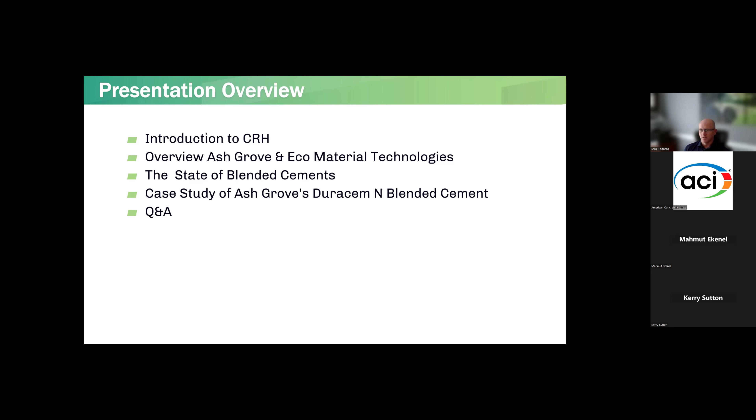So just to introduce you all to CRH, we are the leading building materials business in the world. We manufacture and supply a wide range of building products, materials, and innovative end-to-end solutions to the construction industry. Our products can be found throughout the built environment, whether it's in infrastructure or homes or commercial buildings. We have a long-standing and proven commitment to sustainability, and we're always considered amongst the leaders when it comes to those ideals. Our materials, value-added products, and building solutions play an important role in shaping a more sustainable built environment. As you'll see as I go through the presentation today, it's in our DNA.

CRH has also been included in the Fortune Global 500 list for over 20 years now. So a large organization, a lot of different business units, as you will see. But today we're going to focus mainly on the cement side of things. So taking a look at CRH's portfolio of products and services: anything from aggregates, lime, cement, ready-mix concrete, pipes, precast concrete products, asphalt, construction services, outdoor living, so think of pavers, retaining wall blocks, things like that, composite structures, and also a whole host of construction accessories make up our portfolio.

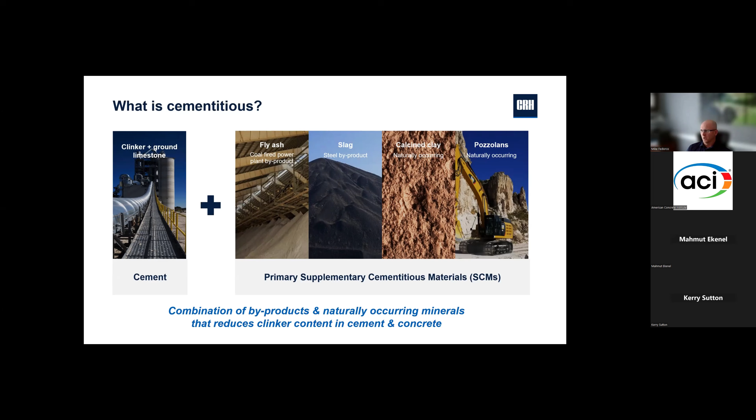In 2018, they acquired Ash Grove, who I work for today, and their assets that gave them a large footprint throughout the United States. And then along the way, they've continued to acquire and build on that in 2024 with some assets that came over from Martin Marietta to continue to expand our traditional cement production business.

Along the way, we also created what we call our Sapphire Group. They are focused on alternative fuels and sources of innovative SCMs. And then most recently, which some of you may have seen in the news, last year we acquired Eco Material Technologies, who is the leading provider of coal ash based SCMs in North America.

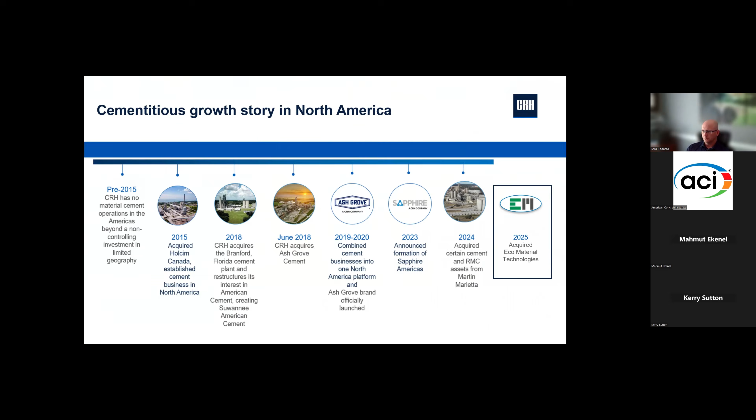So when we talk about cementitious, just to wrap things up here under CRH, it's the three companies working together in conjunction that I have up here on the screen. It's Ash Grove, who is one of the leaders in North America of manufacturing traditional cements and blended cements. Eco Material Technologies, our newest family member, they are a leader in bringing SCMs to the market. And then Sapphire, who is transforming residual and non-recyclable materials into alternative fuels and raw materials that we can use for our products.

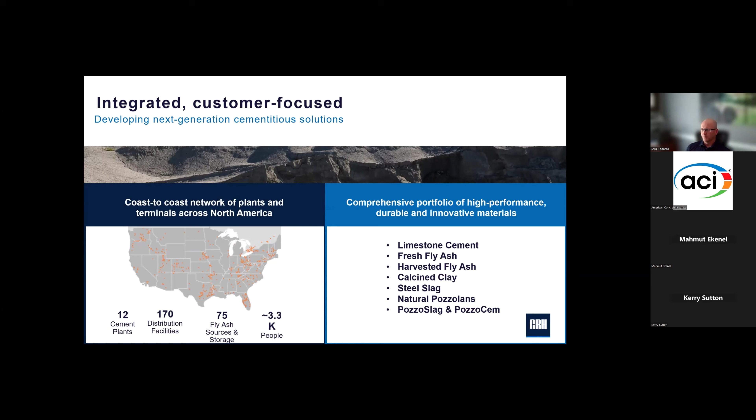We have a comprehensive portfolio of high-end, performance and durable innovative materials, including limestone cement, which is a majority of what we've been producing here, fresh fly ash, harvested fly ash, calcined clay products, steel slag, natural pozzolans, and green cement offerings that are innovative binder solutions being offered by Eco Materials, known as PozzoSlag and PozzoCem.

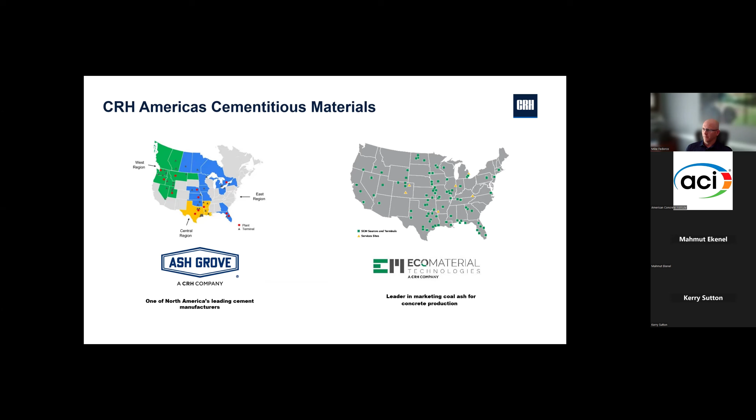So just to give you a little more background on Ash Grove, who we are. While Ash Grove was acquired in 2018 by CRH, it's not a new business. It's been around since 1882, when it was founded. It has over 2,000 employees across 60 locations here in North America, and we service customers in the US and Canada. We deliver high performance cementitious materials, technical expertise, and customer support.

We're focused on innovation, consistent quality and sustainability. Our products go into building everyday infrastructure, whether it's highways and bridges, schools, public facilities, commercial and residential projects. We're committed to safety, operational excellence, and our customers' success.

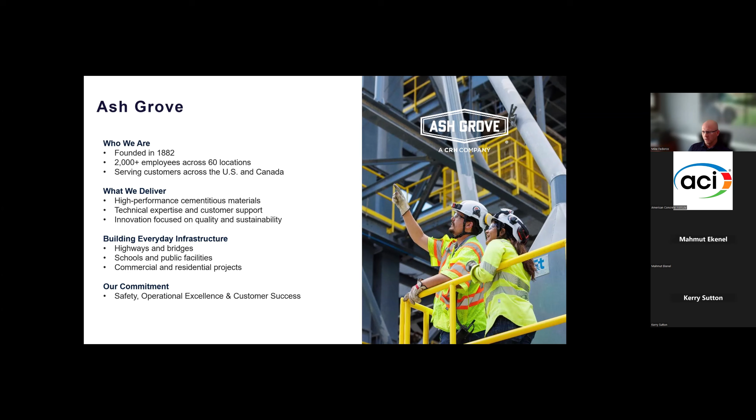Eco Material Technologies, they're North America's largest marketer of coal combustion products. As you saw, they have a nationwide network of terminals and distribution facilities, servicing customers across multiple industries. They deliver sustainable cementitious materials, primarily SCMs, that can be used in blended cements, resource recovery and beneficiation solutions at sites, technical expertise in those areas, and logistics support.

They have an extensive logistics network to help service their customers anywhere in North America. Supporting infrastructure, they support the production of concrete and other construction materials, manufacturing applications, land management, and redevelopment projects. Their commitment is to innovation, sustainability, and operational excellence.

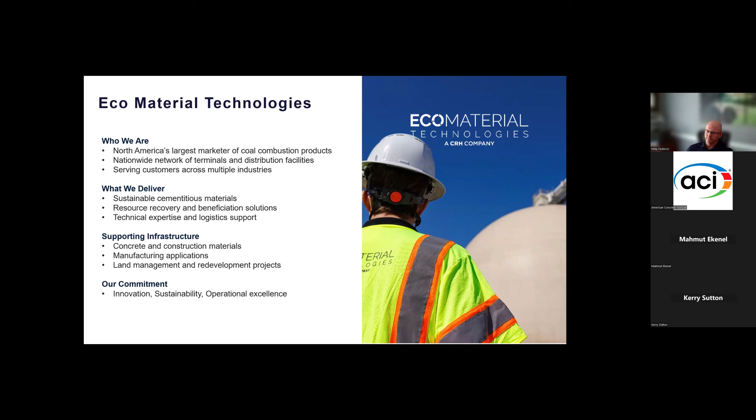So just to dive deeper into who EcoMaterial is, on the surface you see the products that they sell into the market and produce, whether the fly ash, the beneficiated ash, harvested products, Syngyp, things like that. But on the backside, when we talk about sustainability and promoting green products, they're providing a service to the coal industry, the coal-fired power industry.

Historically, fly ash has been used in cements and concrete. But in this case, a lot of it could not be used or wasn't deemed suitable at the time for use, so it was landfilled. There are large landfills throughout the United States near coal plants holding this unused coal ash. EcoMaterials provides a service where they will harvest that and beneficiate it, getting it ready for use as a suitable SCM in product.

So not only are they on the front end providing a product that's lowering clinker in cement, but also they're taking waste product that was just sitting in a landfill at the coal-fired power plants and putting it to good use.

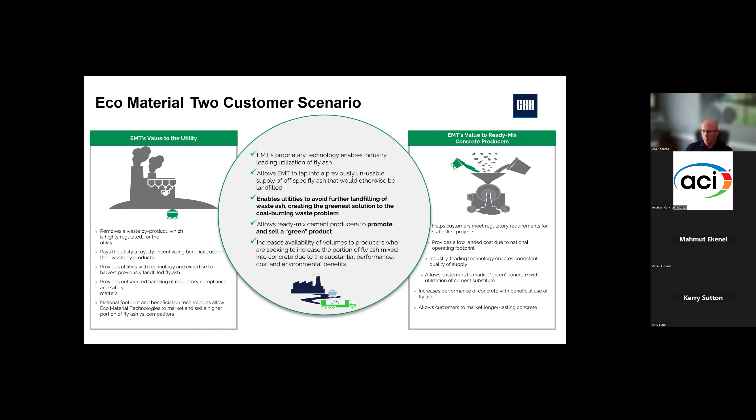So just a little bit more about EcoMaterial, since they're our newest family member, about what they do and their products and services for those of you who aren't familiar with them. Fresh fly ash is a big part of their business - harvesting, partnering with coal-fired power plants throughout the U.S., harvesting that fresh fly ash, and handling the logistics involved with getting it to the customers.

As I just mentioned, the landfilled ash near these plants that's been sitting there for many, many years in some cases - they are heavily invested into harvesting and beneficiation of that product to make it into a usable product that we here in the cement industry can utilize.

They're also involved in natural pozzolan processing. They have a few sites throughout the U.S. where natural pozzolans are being sourced, processed, and made usable as an SCM for cements and concretes.

They have manufactured products as well. So when you look at the Pozzo slag and the Pozzo SCM I mentioned earlier, they're alternative binder materials - taking what was deemed somewhat unusable waste products and transforming them into something interesting, neat, and innovative. In these cases, some of these are zero clinker factor type materials.

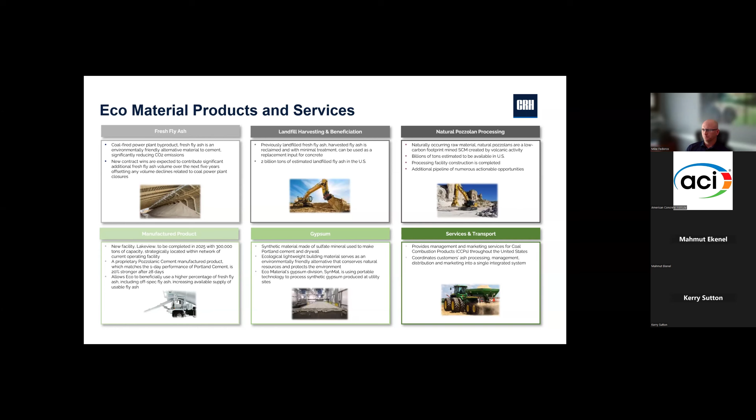We've committed to some ambitious goals - a 30% absolute reduction in group-wide emissions by 2030, targeting scope 1, scope 2, and scope 3. That aligns with our ambitious target of being carbon neutral by 2050.

In addition to what I mentioned with Ash Grove and what we're doing with blended cements and EcoMaterial, CRH also has a dedicated innovation fund that invests in internal projects and external partnerships to help support new technologies and innovative ideas. There's also a wing of CRH known as CRH Ventures, a corporate venture capital arm that partners and invests in startups, once again supporting innovative new ideas to bring low carbon solutions to the market.

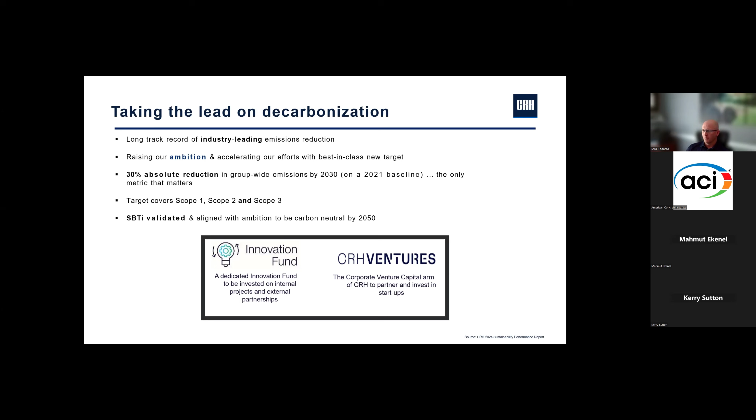So our next segment here is going to be on blended cements and new SCMs, and kind of the state of where things are at and where we're headed.

So the American Cement Association put out the roadmap to carbon neutrality. There's a lot of pieces to it - whether it's on the clinker side, reducing CO2 emissions there, or the cement side - what can we do? We're talking specifically here about blended cements and lowering our CO2 footprint with that. In concrete, something can be low carbon, but if it doesn't last very long, then over its life cycle it's significantly high carbon. So we want to make products that last and are more durable than what's been put out there in the past. And then there's carbonation as a sink, a CO2 sink as well - so there's different pieces to the chain.

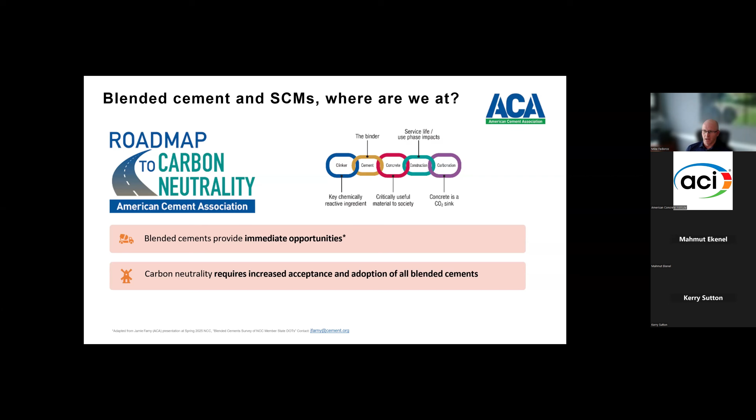Today we're talking about the blended cement piece to it. Blended cements have been utilized successfully in many parts of the world and here in the US for many years. There's immediate opportunities to continue to leverage that and expand upon that to help meet these goals in the roadmap. But in order to do that, we have to increase acceptance and adoption of blended cements. That's not something that just happens with the flick of a switch. There's a lot we all need to work together as an industry to put out good products that are not only sustainable, but they're also durable, and meet the needs of our end users and are going to last the test of time.

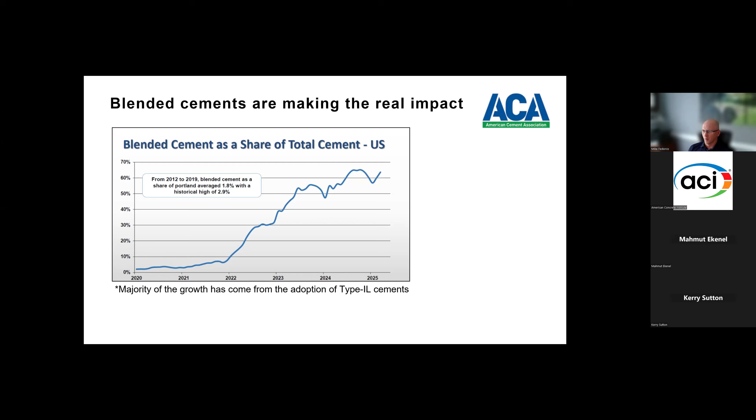Taking a look at where we're at today here in the US, blended cement growth has taken off since 2022. That's really been driven by the adoption of Type 1L cements, who are considered a blended cement. So there has been some changes. The positive is it's the most widely used type of cement in the United States today. There's many, many successful projects out there that utilize and have been utilizing those cements. I would say if there's any negative as an industry, we probably could have done a better job rolling out, introducing the product to the market. But largely, folks have gotten over the initial growing pains with it and are using it successfully, whether it's infrastructure or residential construction or commercial, whatever it may be. The Type 1L cements have been adopted and are being used.

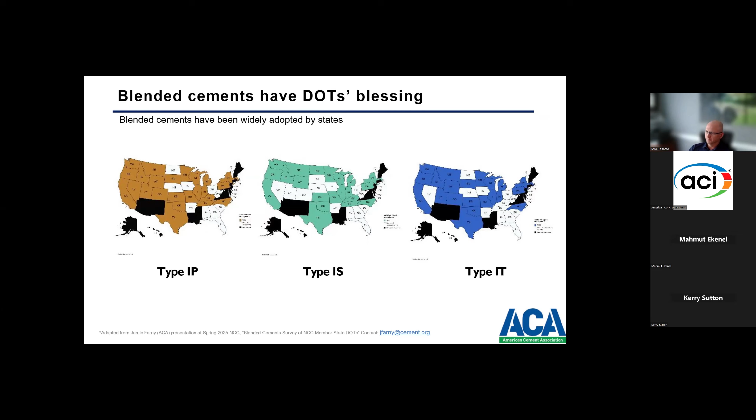Switching topics now, let's talk about what goes into a blended cement. You have your traditional Portland-based, clinker-based cement blended with some type of SCM. Traditionally that's been whether a fly ash that comes from a coal-fired power plant, or a slag that comes from a steel blast furnace, or a natural pozzolan from a volcanic eruption. There's also starting to be some really interesting and new innovative SCMs being introduced out there by startups that are going through some kind of transformation in a reactor, taking what was once probably deemed an unreactive waste product that wasn't really considered for use as an SCM, that could ultimately be used in a blended cement.

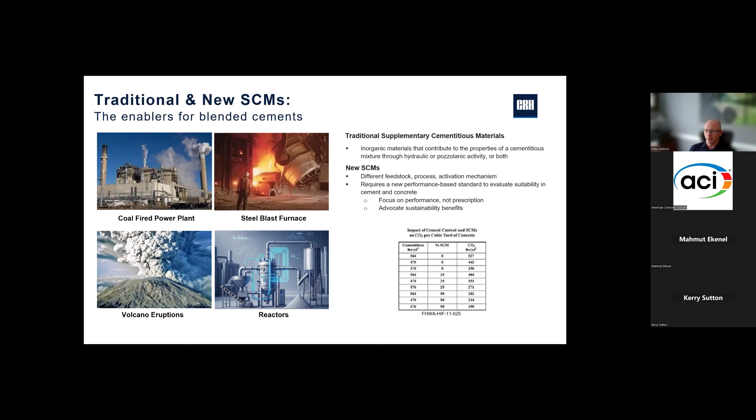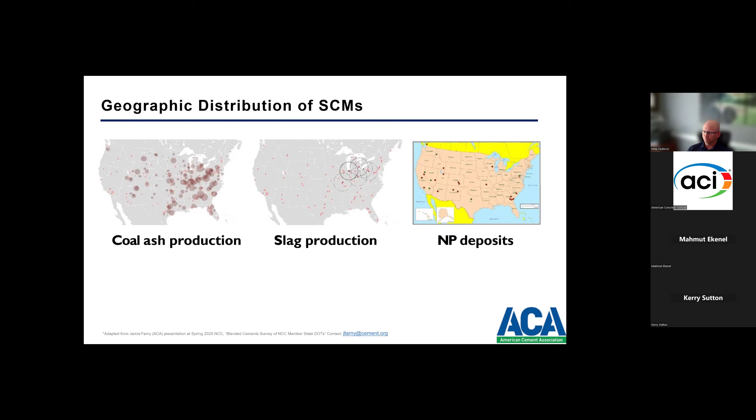Then there's also, as I mentioned, the new binder developments. I apologize if any of you on the call, I don't have your company up here. There are so many of them right now getting into the market, bringing innovative new solutions out there for binders or SCMs. They're taking something that maybe was an unused or unusable waste product in the past, figuring out how to transform that and make it into a reactive SCM that we could utilize, or something that lowers the carbon content of the overall cement mix to benefit our sustainability goals. But there's so many of them out there, and it's great to see that there's a lot of not only innovation going on, but the market's recognizing that, and they're investing heavily in these businesses.

So what's our pathway to blended cement success? We had to continue to prioritize sustainability, but also the products need to be resilient. We can make the most low carbon cement out there, but if it only lasts 10 years and has to be replaced, that adds up pretty quickly. So we need products that are resilient. Not only is it not sustainable if they don't last, it's expensive, with the short life cycle. So we want products that are going to stand the test of time, but also be able to deliver low carbon solutions.

We want to adopt performance-based specifications, putting the focus on performance. When we bring these products to market, how do they perform? What box do we have to try to fit them in? Part of that comes with optimized concrete mix designs. As we come to market with these different blended cements, they may be a little different than traditional cements or cements being utilized today. There may be some different things that need to happen as far as mix designs. That's something we need to be aware of and make sure we're coming up with those solutions on the front end.

Before I can get into that, I have to give you the catalyst behind how the story started. Many of you are familiar with alkali silica reaction, ASR, but just a quick level set for everyone. ASR is an issue with concrete that can appear when the right conditions pop up. If you have high alkali cements, reactive silica, and moisture, and they all are at the right time in the right place, you can have an ASR issue.

How it happens is a gel forms in the cement around the aggregates as a result of these reactive aggregates and the cements having a chemical reaction. That gel, when it comes in contact with moisture, which most concrete does, will begin to expand. When it expands, it puts intense internal pressure on the concrete, which leads to cracking. Not just an occasional crack here or there—it's really like an alligator crack, major cracking, deterioration of the slab or the structure.

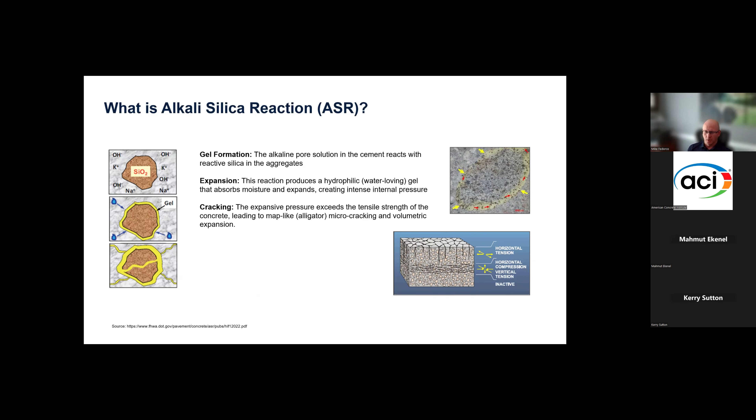So how does that tie into our Duracem N product and how we got here, or what we're doing? The pictures on the right are just some examples of what I mentioned with ASR and the damage it can do. As you can see, the deterioration of the paving surfaces is extensive when it does occur, and they are very expensive remediation projects.

So how did we get here? Our Louisville, Nebraska plant, which is about 30 minutes south of the Omaha area, has been producing a product known as Duracem F since the 1990s to help combat this issue.

How it came to be is in the 1990s, the Nebraska Department of Transportation, NDOT, experienced significant issues related to ASR. They had the perfect storm of cements that were high in alkali, local aggregates and sand and gravels that were reactive, and it's not an arid environment—Nebraska is going to experience moisture throughout the year. Those three things coming together caused significant ASR-related cracking and damage to their paved surfaces.

They did not have a locally feasible non-reactive aggregate to help combat that. So Ash Grove, operating the cement plant there in that region, worked with the Nebraska Department of Transportation to come up with a solution. We experimented with various SCMs to help mitigate ASR through extensive research and pilot projects, working hand in hand with NDOT.

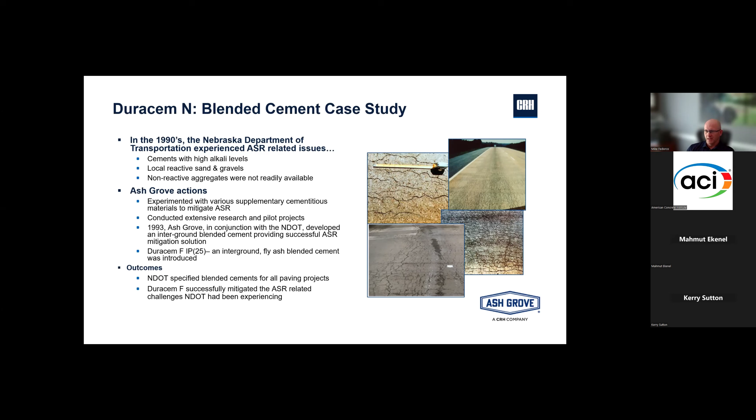As a result of all of that, NDOT saw the results—they were fabulous for them. It really reduced their issues, and they began to specify blended cements for all paving projects. As a result, Duracem F was a successful commercial launch starting in the 1990s up until today.

And why do I say up until today? Well, there's nothing wrong with Duracem F—it continues to be used successfully—but being innovators here at Ash Grove, we're always looking for what's the next thing. We identified many years ago calcined clay as an opportunity not only to tackle the ASR issues successfully that they were having in that region, but also from a sustainability standpoint. The increasing demands coming from the market that we started to see in the latter part of the 2000s into the 2010s showed there were opportunities to leverage a calcined clay blended product at our Louisville plant. So not only does it mitigate ASR, it lowers the clinker content of the cement. We saw an opportunity there.

This met the needs of our increasing requirements from our end users, our customers looking for a more sustainable, lower clinker cement. There was a national trend. There's fewer coal plants today in the US than there has been historically. They continue to close down, and then there's not as much ash available.

We also learned, through clay and the calcination process, we could produce a consistent quality product, right? We're manufacturing it. We knew exactly what the performance was; we could hold it within a tight window of what it was going to do. So we'd have a very tight window of performance and quality that we could bring to our customers. And the best part of it was it's a locally sourced clay.

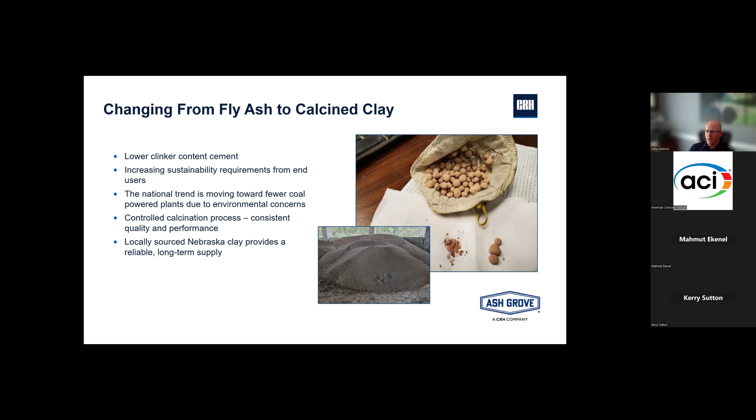We were able to find a suitable clay deposit very close to our Louisville, Nebraska plant. So it was a locally sourced clay. It did not have to be transported across the US somewhere. There's a lot of it. It's a very long-term supply. So it's going to be a stable product for many, many years in that market.

So just to give you a little history of how we got there with our calcined clay, our Duracem N products, a little timeline here. So it began back in 2019. We were exploring, like I said, being innovators, exploring different options. Potentially calcined clay became interesting.

In 2020, we began to do some trials on the mill at our Louisville plant, looking at the strength development and ASR mitigation. And we started playing around with a 30% calcined clay blend. We were seeing successful results with it, and we submitted it to NDOT and gained their approval for it.

We continued more trials through 2021. There were still some things we were trying to work out with it, but we were able to up the content of clay now to 35%. So just to compare where we finished and where we've been historically, our Duracem F product, our fly ash based product, was a 25% replacement. Now we're up to a 35% replacement with the formulation with calcined clay.

Then came 2022. As probably all of you that work in this industry know, those were crazy times, right? You couldn't get enough of anything. It doesn't matter if you were in cement, plastics, steel, whatever it may have been related to the construction industry. Things were booming. You just couldn't get enough of anything.

And as a result, with our cements and our Duracem products, we just couldn't keep up with customer demand. So we had this product known as Duracem N that we had been working with. It looked promising. We talked to some of our customers and they said, yes, we'll take it. It's better than not having anything today. They started using it on projects.

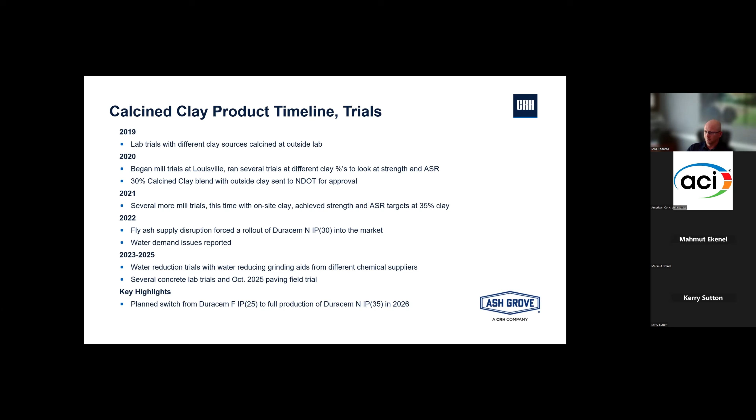So next, I just want to talk to you a little bit more, now that you have the history of why and how we went from a fly ash product to a calcined clay product, about the process that we went through to bring that product to market. We'll start with the clay source identification, talk about some of the trials, validating what we were doing in our labs with third parties to make sure the product was as good as we thought it was, what went into the process and getting the plant up to speed, and then trials there, and then ultimately customer testing and DOT approval.

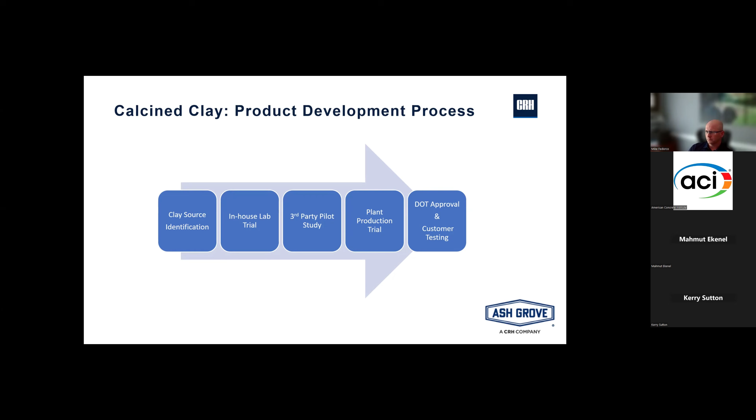So number one is, we had to find a suitable clay source. There are clay sources readily available throughout the U.S. Not all of them are the same. Clay varies depending on the properties you're looking for. But ultimately, looking at different sources and finding ones that were going to work for our project was an extensive research project. Ultimately, we identified one very close to our plant, which was great from a logistics, locally sourced standpoint. And that is the one that we are moving forward with for this product.

But there's a lot that goes into it, whether it's core drilling or testing samples in the lab. How feasible is it to get that material out of the ground? Is there a lot of overburden there? Is it relatively easy to get to? What kind of infrastructure is in the area? Sometimes these things can be in remote areas. Can you get it out of there economically and safely to your plant? So like I said, we identified a source that checked all those boxes to move forward with our Duracem N clay source.

So once you have the clay sourced, what is the process? You need to be able to handle that material when it comes in from the source out in the mine. You need material handling, you need equipment to calcine it, you need storage. All those things we had to consider at our plant and make modifications to be able to produce a consistent product. That took some time, obviously, and investment at our Louisville, Nebraska plant. But I can report that we are successfully online and beginning to produce the product at scale.

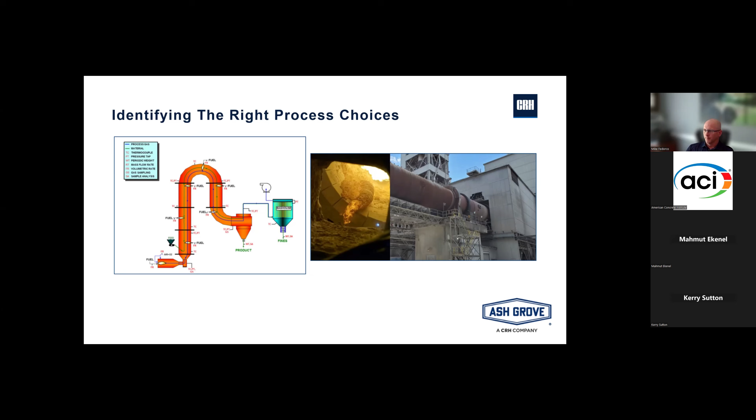Taking a look at the testing, as I mentioned, we had a successful product with Duracem F in the market. It was doing a great job with the ASR mitigation, which we test against ASTM C1567. But it also had to perform strength-wise as well. We could probably hit on some things that mitigate ASR very well, but if you don't have the strength, it doesn't do anybody any good. So this was a balancing act between the two.

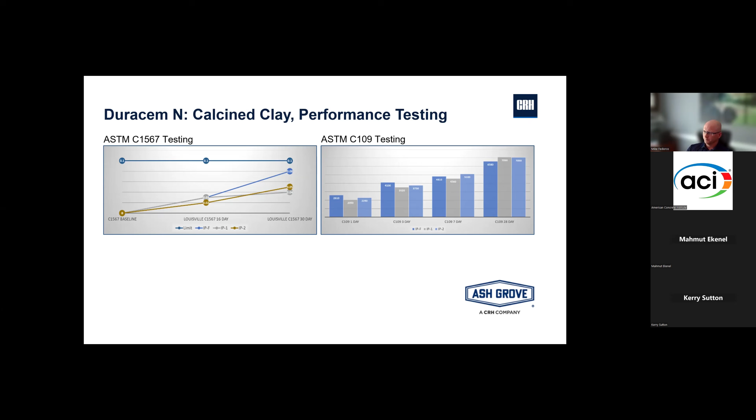So not only on the mortar side of things, testing and making a product as a blended cement producer, we wanted to take it a step further and make sure that it performed in concrete and met our customers' expectations on that side of things. We did a large collaboration with different parties. Some of them were integrated ready mix products companies within CRH, Lyman Richey, and Preferred Materials. We also utilized our Ash Grove corporate lab in Kansas City to vet some of this out.

But we did a lot of trials to understand the plastic properties and strength and things like that, how the material handled, how it placed, through different test methods. Specifically talking about test methods when it came to concrete, we utilized the float test.

It was developed by Dr. Tyler Ley to assess the finishing characteristics, right? How's the surface close? What does the surface look like as it's closing? How easily does a trowel of different types pass over it? So we put it through all that.

We also, through the process, as we worked hand in hand with these customers and our partners, saw that, hey, that brown cement's pretty interesting looking. I think we heard many comments that it looked like a chocolate bar. The test results look great. It's performing awesome. But can you make it a little more gray? So we heard that loud and clear.

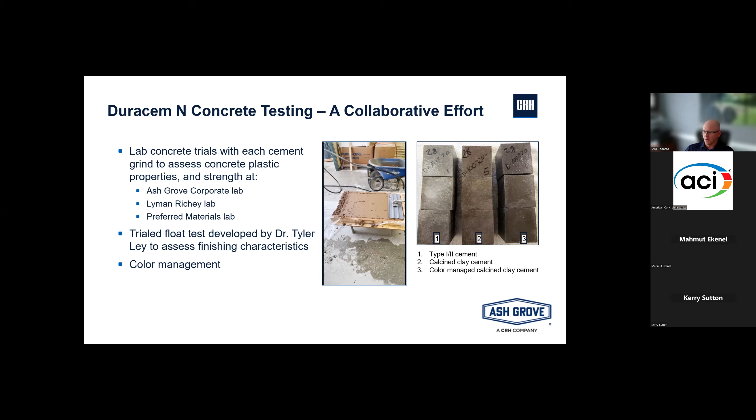So then came the most exciting part of this project so far. Okay, we've done all this lab testing, we've done all this scale up at the plants, we've worked with our partners on evaluating the mortar and the concrete. But until you get it out into an actual project and put it through the equipment that's actually going to be utilizing it out in the field, you never know, right?

So last fall, we conducted a large trial, a 2.5-mile slip form paving road pour in Nebraska using this product that was manufactured at our plants, Duracem N 35. Partnering with Lyman Richey for the ready mix production, prior to starting paving we were out there doing test mixes, putting the material through the plant and the trucks, dispensing it, making sure everything was good. We were working flawlessly by the time the paver showed up on the project.

The pavers ended up paving the road with really no issues. It went as planned. Weather cooperated with us. It was late in the fall, but we got a nice stretch of weather, so that was great. But the feedback from the ready mix level and the paving contractor was, hey, if it wasn't brown, because we weren't color managing this batch, we would have thought it was your Duracem F product. So that was the best feedback that we could possibly get.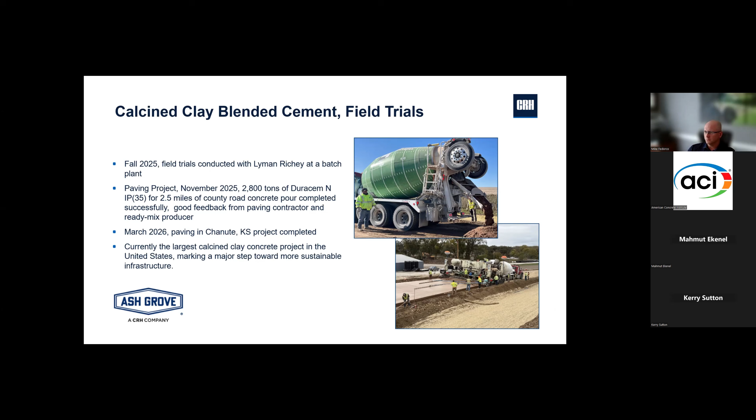So not only, like I said, did we work with our partners on the concrete side, with Ready Mix and our concrete contractors, to successfully do those installations and pour those roads. There's also the third party testing, right? We want to validate what we're seeing through a third

party, and we have partnered with MnROAD, the Minnesota research division. We've laid down some of it there. We've also worked with the University of California Pavement Research Center as far as utilizing calcined clay cements to do their testing. All of this is a partnership. Like I said, it's a collaboration between all of us in the industry to work together on this.

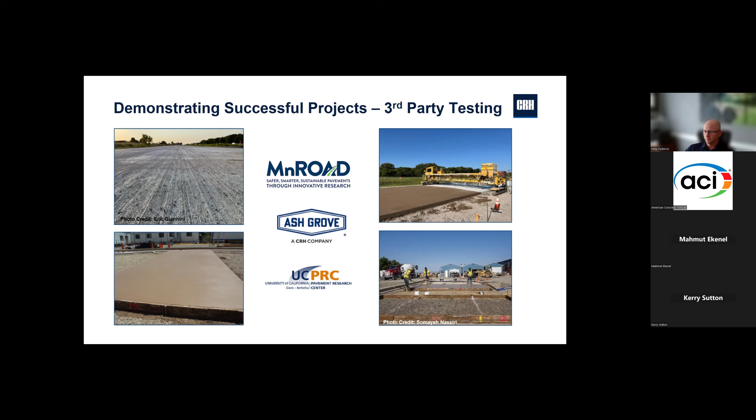So what's the future of blended cements? Continued collaboration throughout, right? We all need to work together to develop the next generation of blended cements. Gaining adoption is key, right? We can have the best products in the world, but if nobody wants to use them or knows how to use them, it's not going to do any of us any good. We are all in this together to ensure success.

Continued efforts between all of us, right? Not only here at Ash Grove, but throughout the industry as we work towards lower clinker and lowering our carbon footprint. Continued research into SCMs. As I said, there are innovative new ideas and new products coming online every day, and we continue to evaluate them. And then balancing sustainability with performance, making sure that not only are the products sustainable, but they perform at what our customers want or exceed their expectations.

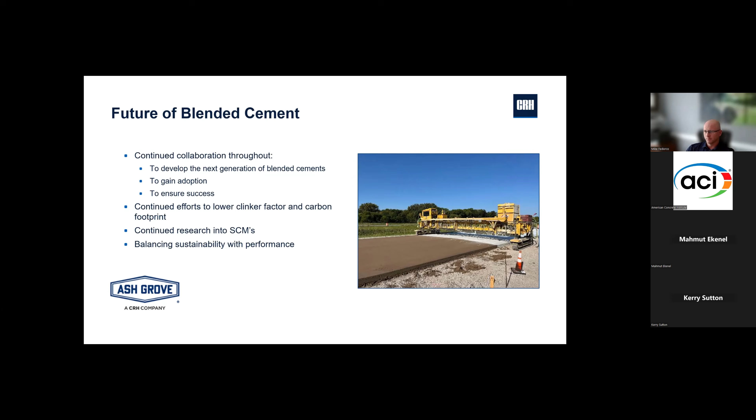And I just wanted to call out, this was a team effort with everything we've done with this project, whether it was NDOT, the Kansas Department of Transportation, from an academic standpoint Oregon State, UC Davis, our contractors Hawkins and Cedar Valley, Lyman Richey, and Sapphire for our division, who helped us identify the clay source and bring that to a reality.